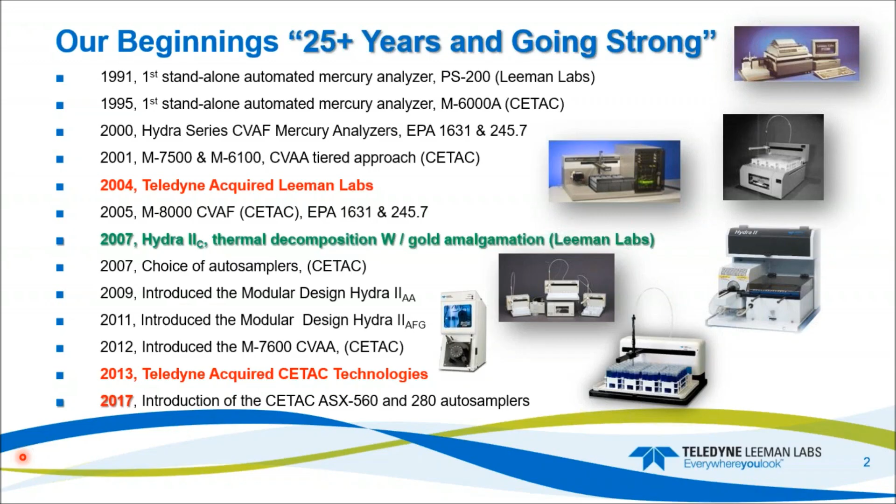Some of the highlights for the Teledyne Leeman Labs mercury analyzers: we have 4 models, the CVAA systems, the Hydra 2AA, the M7600, the M8000, which is atomic fluorescence and atomic fluorescence with gold, and then the Hydra 2C, which is a combustion system. We have a patented gas liquid separator for the QuickTrace systems, which patent expired in 2016. The QuickTrace systems have a 4-channel 12-roller pump.

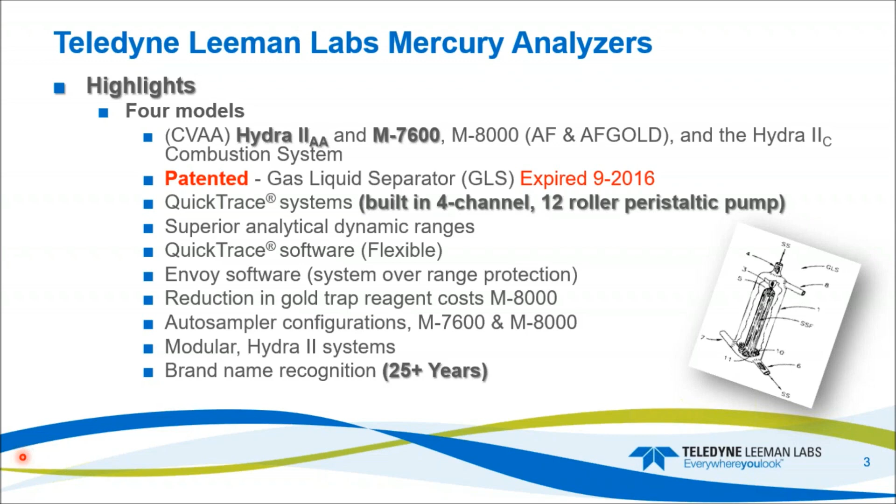All systems have superior dynamic range. The software on the QuickTrace is extremely flexible, and the Envoy and the QuickTrace have overrange protection. We have gold trap reagent cost savings in the M8000, the CVAF system. Auto sampler configurations for the 2 QuickTrace models, and the Hydra products are modular, which is a nice feature, and then 25 plus years of brand recognition.

So the 7600 is our most versatile CVAA system. Detection limits are less than 0.5 nanograms per liter, and that's in the most sensitive mode of operation. With that system, we have the capability of achieving the method detection limits for US EPA 245.7. The method detection limit, as I recall, is 1.8 nanograms per liter.

But I have to warn everybody that we need to run this with caution. With the BrCl, the bromine monochloride, which is the solution for oxidizing the samples, there is a possibility of forming bromoform with certain samples, and that organic compound will absorb at our wavelength of 253.652. But with that said, the system can hit achievable method detection limits and reporting criteria for that method in less than 90 seconds, achieving a less than 1 nanogram per liter MDL with the method.

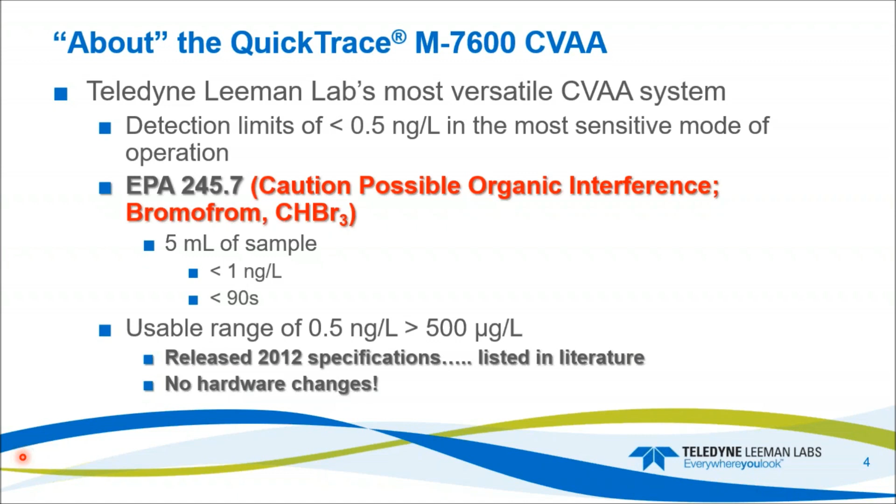Typical range for the system as received is 0.5 nanograms per liter to greater than 500 micrograms per liter. That's our release specification, with no hardware changes. The QuickTrace M7600 is a double beam system, so we have double beam optics and lamp stabilization.

So that is a thermally stabilized lamp compartment, with electrical optical feedback for the lamp control. What this does is, as the lamp ages, it senses the radiation coming off the lamp and bumps the power up, so during the lifetime of the lamp, our IDL or MDL doesn't change. It's a very nice feature, so when the customer is using their M7600 day in and day out, they're going to achieve the same response for the same standard.

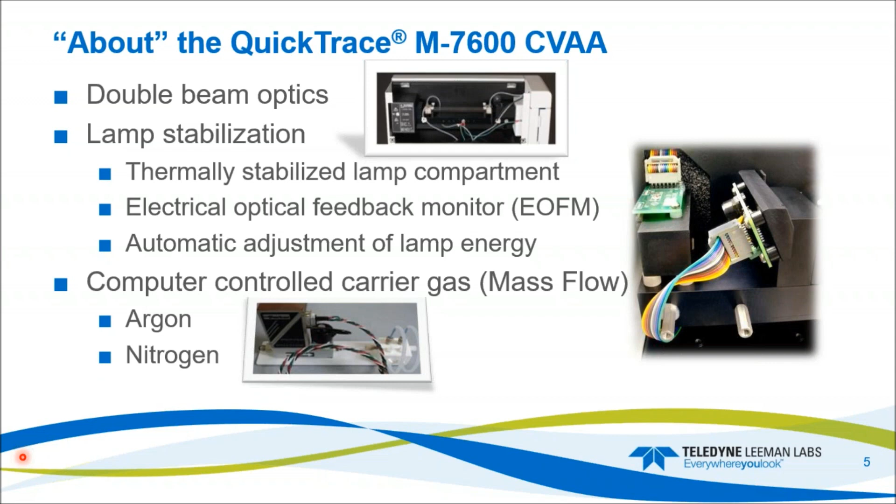Computer-controlled gas flow. It's a mass flow controller. The system is designed and optimized for argon, but it'll also work for nitrogen, greater than a liter per minute argon flow. But since it's optimized for argon, the nitrogen will not quite achieve a liter per minute. It's more in the range of 750 milliliters per minute.

Gas liquid separation. So I mentioned earlier about the patent on the GLS, or the gas liquid separator, which expired in 2016. So this is a center post design, and that's a large reaction surface area to our liquid volume. So when it's running, it looks like it is running basically empty. You're going to see a small amount of liquid at the drain port, and that's about it.

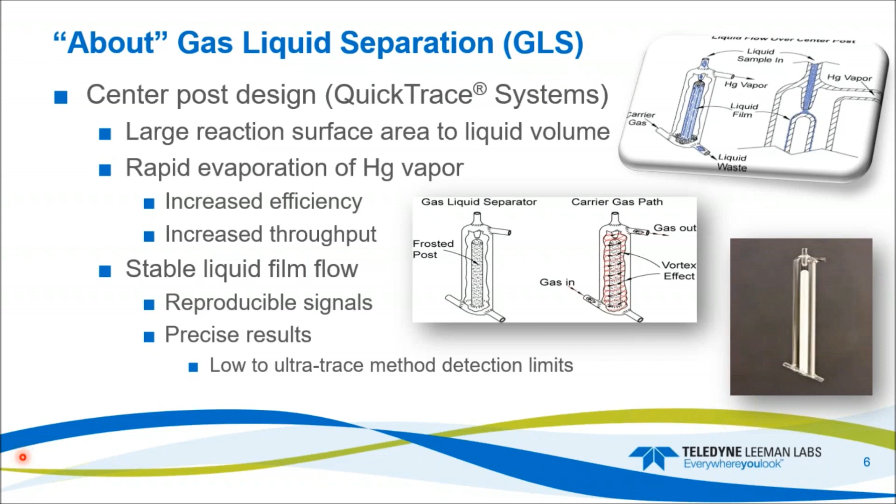So what this system will do for the customer is increased efficiency. That'll increase your throughput. It gives you a stable liquid film, liquid flow, and that in turn is reproducible signals and precise results. So when you take the reproducible signals and precise results, then that affords the customer that ultra-trace method detection limit. So it all starts with the gas liquid separator and our mass flow controller, our double beam optics, and then the 4-channel 12 roller pump.

So the theory of operation. So the samples all have to be acidified. So everything has to be digested. So the mercury's in Hg2+, and then the sample is delivered by the autosampler to the gas liquid separator. So en route to the gas liquid separator, our reducing agent, which is 10% stannous and 7% HCl, already reduces the acidified mercury in the sample to Hg0.

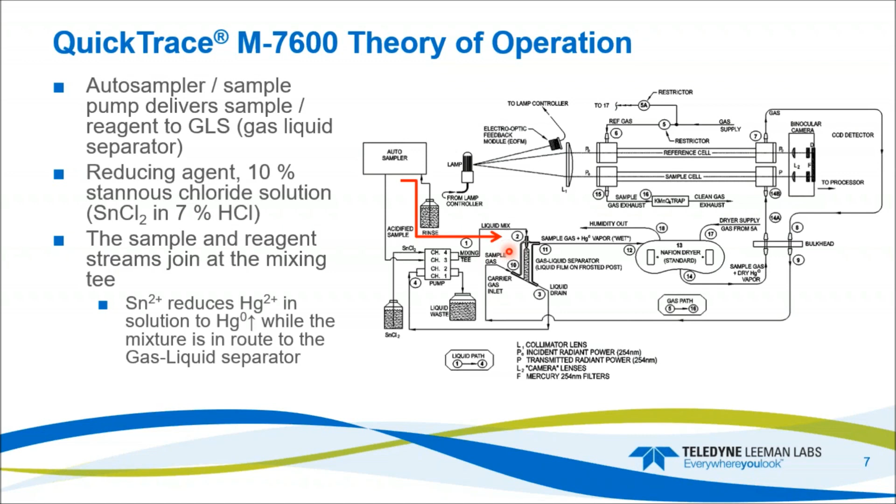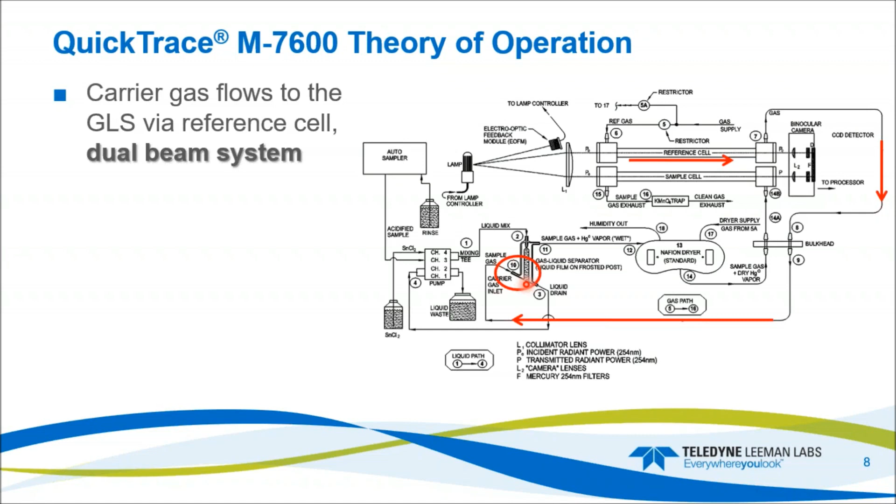From there, we introduce our gas flow. So our gas flow is flowing through the dual beam optics. So it flows from left to right, flows up and around, and then comes in and goes into the bottom of the gas liquid separator. The elemental mercury at this point is already reduced, so it's easily stripped off, and from there it flows into the Nafion dryer, where the water is removed and it's off-gassed into the laboratory.

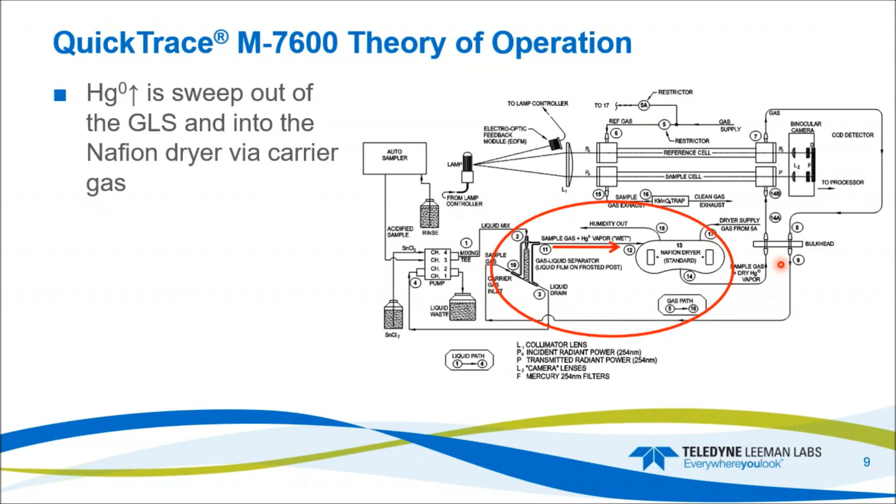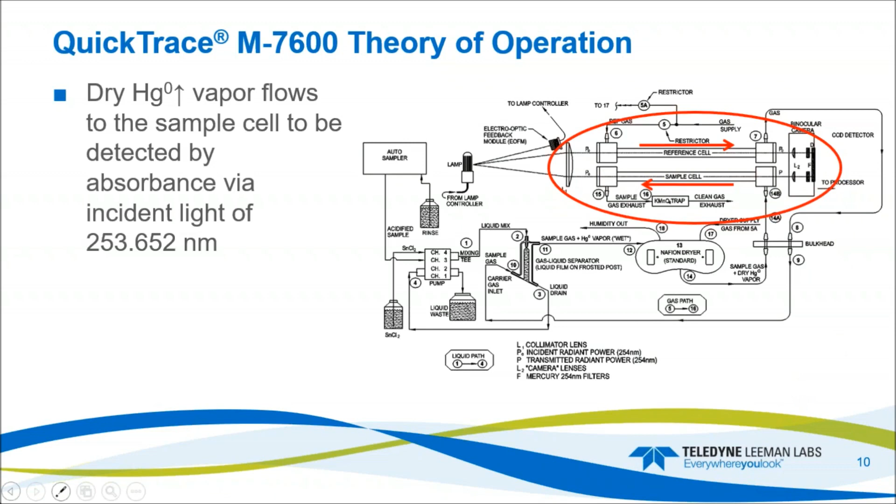It's just water vapor, and the carrier gas, which is argon, and it's laden with mercury, that leaves the dryer, and it goes up into the sample cell. And in the sample cell, the gas flow moves from right to left, so it's counter from the direction of the carrier gas, and this is going to measure the absorbance at 253.652. The detector is a CCD, so we have 2 beams and collimating light through the sapphire windows, and then off to the detector where the light is filtered and the absorption is measured.

The M7600 has very broad linear ranges, greater than 4 orders of magnitude. So our typical dynamic range for the system is 0.5 nanograms per liter to greater than 500 micrograms per liter, or ppb. So here's an example of the orders of magnitude of linearity. So we're achieving 3 9s and an 8 9, and here's the values from this curve.

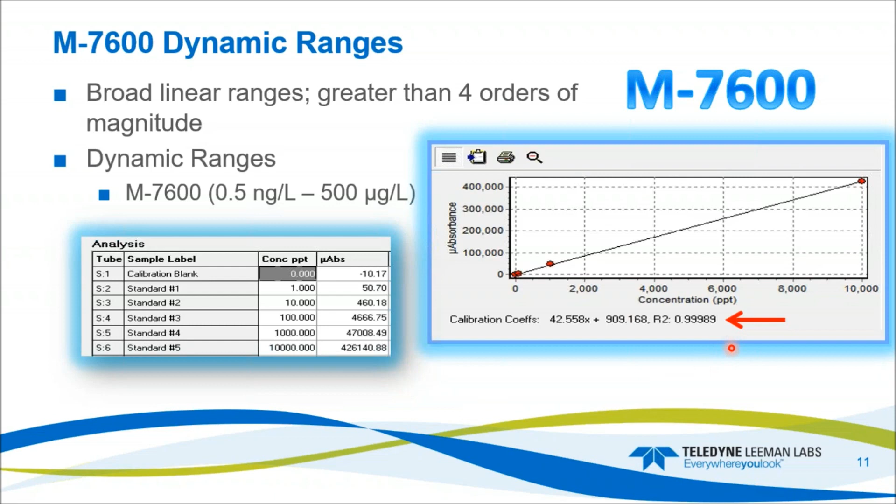So we went from a 1 nanogram per liter, 1 ppt, up to a 10,000. So here's the first order at 10 ppt, 100 ppt, 1,000, and then a 10,000 ppt, or a 10 ppb. And you can see the response. The response is very linear, greater than 3 9s.

So now that the basic theory of the system has been discussed, what affects this dynamic range? How can we get such a broad dynamic range with this system? So it's gas flow, pump rate, and time in sample. So if we adjust the gas flow, high flows will equal a short residence time, and that gives us speedy results, but it decreases sensitivity. So again, decreased sensitivity, we expand that dynamic range.

Low gas flows are long residence times within the optical bench, optical cells, and that will increase the sample times, but it increases the sensitivity. So if it increases the sensitivity, we are decreasing our IDL and our MDL. Pump rate, same thing. It'll increase or decrease time to the GLS, and that changes the mercury load within the system that is taking the Hg0 and sending it off to the optical system for measurement. So that changes our flow.

So gas flow and pump rate, and now time in sample is the third leg of the stool. So time in sample to adjust a steady state for a flat signal on the plateau for peak height. We can also use peak area. So if you want to just measure everything under the curve, your peak signal will be similar to a liquid chromatography peak, and it will be everything under the curve. You can go really, really fast. We can typically run samples less than 60 seconds and more in the range of about 50 to 45 seconds.

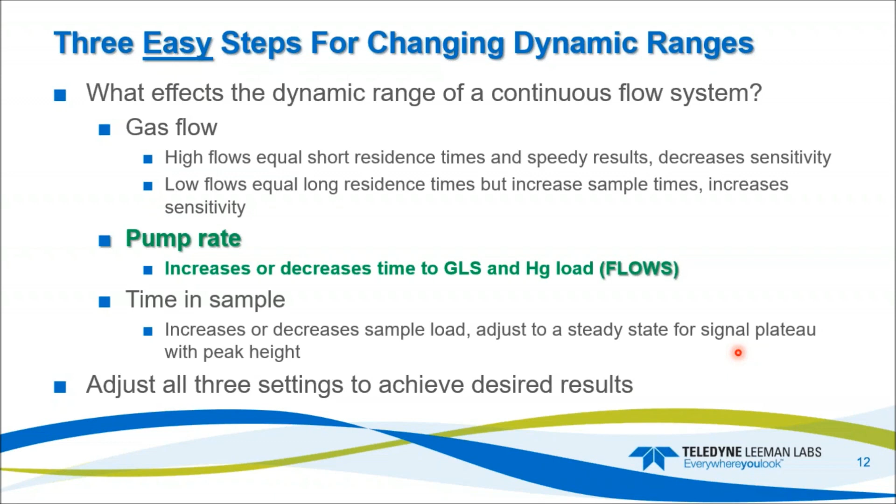So you adjust all three of these settings to achieve your desired result. So again, 3 steps: change the gas flow, change the pump rate, and change the time in sample. So what are the advantages of this 12 roller 4-channel pump?

So the original tubing harness gives you UltraTrace method detection limits. The sample's not consumed, so you can go back and check out the responses from samples that may be in question, so you can allow repeats and validation checks. You can also dial in the flows for high concentration or UltraTrace analysis.

It gives us wide dynamic ranges, and the liquid uptake is from greater than 1 milliliter at 5-second sample to a max rate of 15 milliliters per minute, and that's at 60 seconds of uptake time. So if you haven't guessed already, the max rate at 100 RPMs is 15 mils per minute with the current pump tubing that we're using.

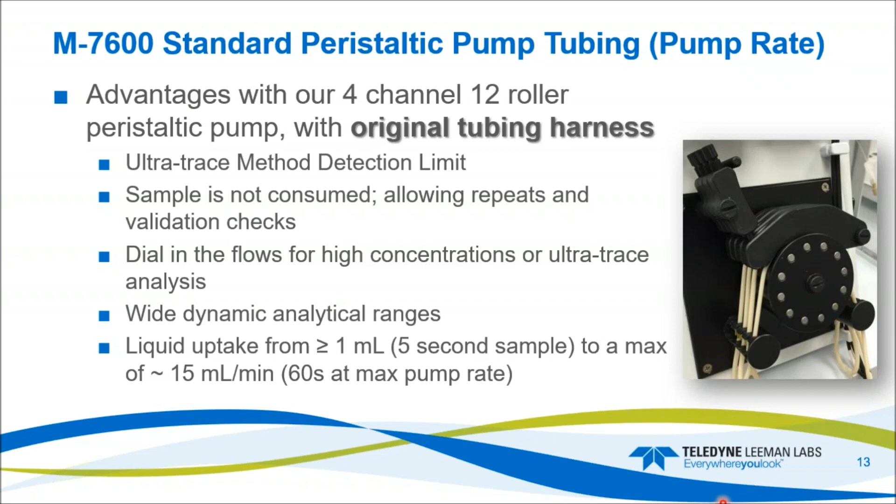So the original pump tubing, parallel channels are for the drain. So channel 1 and 2 are using yellow. The ID is 1.42 millimeters, and the part number is SP5705A. For channel 3, which is this one right here, that's still yellow, same ID at 1.42, so same part number. And channel 4, which is black, that's our reducing pump tubing, and that is 0.76 millimeter for the ID, and the part number is SP5705B.

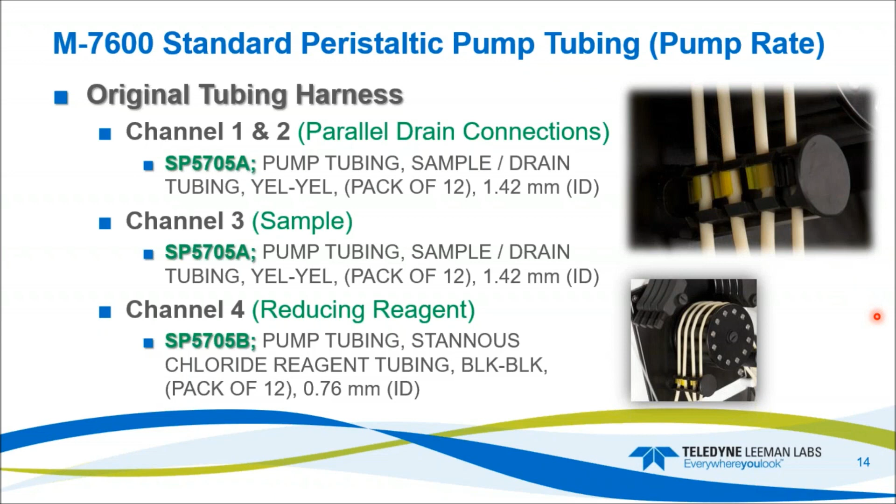So why do we have 4 channels and 3 are the same? So we're pulling sample in and then pulling reagent in, and we want to ensure that that GLS runs empty. So we exceed the input of the volume with the output going to the drain. So we make sure that the system is empty at all times.

So the alternate pump tubing, this is now where we get into the green chemistry. The introduction alluded to green analytical. So the advantages now are still, we have UltraTrace detection limit. Still the sample's not consumed, and you can do the validation and checks of existing samples already previously ran. You can dial in your flow concentrations for UltraTrace analysis.

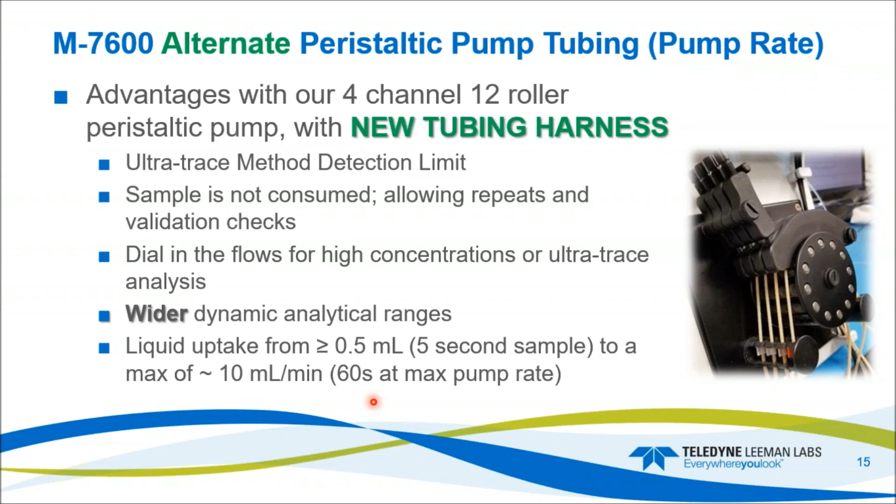That's still in play, but we have a wider dynamic range, and that's simply because we're using less sample. Less sample is part of the 3-legged stool. We're going to be changing the process slightly, and we're going to increase the concentration by reducing the sensitivity of the system. Liquid uptake is 0.5 milliliters, and 5 seconds is our minimum, and now our max flow rate is approximately 10 mils per minute, 60 seconds at 100% pump rate.

The alternate tubing harness, channel 1 and 2, the part number is 15-4308-102, and our ID of that sample tubing and waste tubing is 1.02 millimeter. Channel 4, which is the reducing, is part number 15-4309-102, and the ID is 0.51 millimeter.

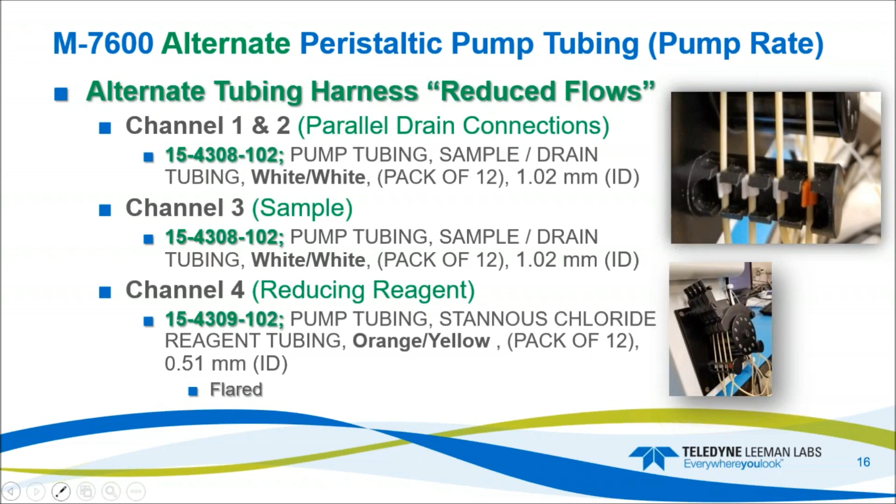This is an extremely small ID tubing, so in order to have it compatible with some of the fittings and barb fittings that we use on the system, we had to have it flared. So this tubing is a small ID, but it's flared, so it holds its flare and it allows the customer to attach it to the tees and capillaries and so forth.

So the alternate pump tubing at 100% rate, as I mentioned earlier, we're now at 10 milliliters per minute. That is 67% of the flow from the standard tubing. So 33% savings right off the bat. The reagent went from 5.7 milliliters down to 2.7. So that is 47% of the standard tubing. So it's a 53% savings on flows.

So our combined flows with the new tubing harness is 40% on combined flows for waste. So that's including the stannous chloride and the sample. So the waste generated is approximately 40% less. At 100% pump rate, that gives us a reduction in stannous chloride because we're 53% less, about 47% of the standard flow for the reducing agent. That's 180 milliliters per hour.

So if we look up some of the standard pricing for stannous chloride dihydrate, a 500-gram bottle could be anywhere from $400 to $600 per bottle MSRP without your discount. So let's just assume $500 a bottle, so 10% stannous in a liter of solution during an 8-hour day. That's going to save us $150 US because we're actually saving 1.4 liters.

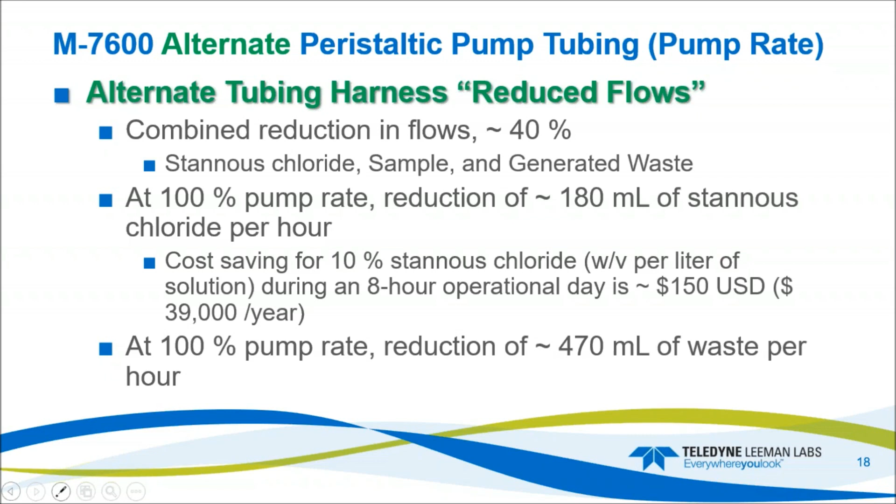And if we multiply per day by 5 days a week, 52 weeks in a year, that's going to give us an overall savings of $39,000 US in stannous chloride alone by going to this green chemistry with the alternate tubing. So at 100% pump rate, that also gives us 470 milliliters of waste reduction per hour, which is also costly

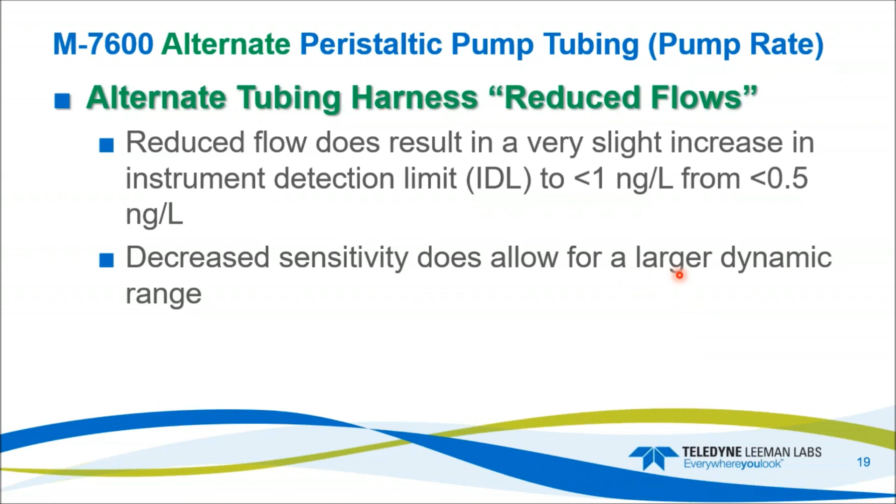to dispose of. Reduced flows do result in a very slight increase in instrument detection limit. We are now at less than 1 nanogram per liter, so that's up from 0.5 nanogram per liter, so not a lot, but slight, due to the decrease in sensitivity. But that decrease in sensitivity does allow for a larger dynamic range of the system.

So the flows are very linear. With the new tubing harness, we tried all different pump rates and different scenarios, and we tested the system for many months, and they pretty much average out to the same. So the reduction in sample uptake is about 33%, and the reduction in reagent is about 53%.

So here's at 80% pump rate, and sample is 12 down to 8, and the reagent is about 4.5 milliliters per minute down to 2.2 milliliters per minute. So again, 53% reduction. That's where the big savings is going to be, in the stannous chloride of this system.

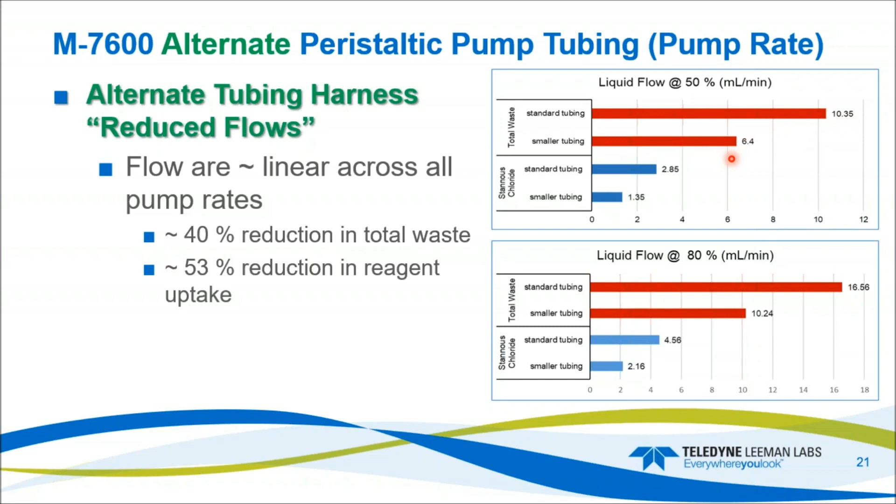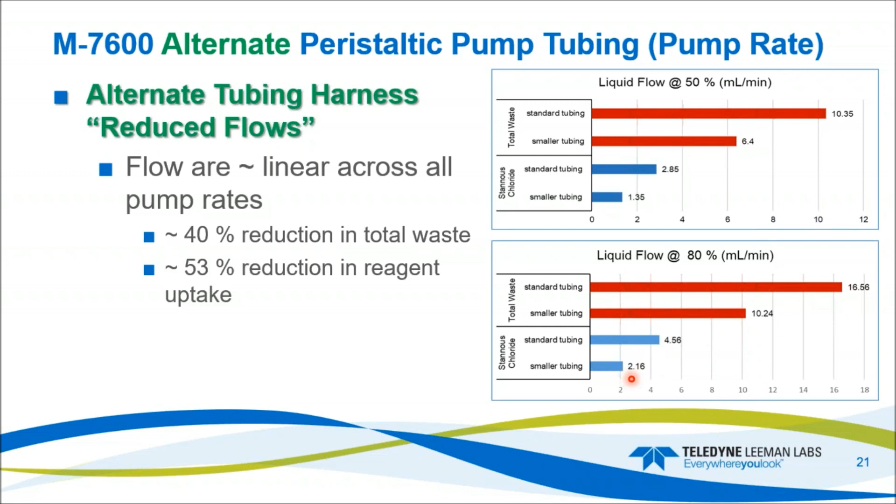So here's an example of liquid flows for waste at 50% and 80%. So 40% reduction. So we're at 10 mils per minute liquid flow waste, down to 6.4, so approximately 40% reduction. And here is 50% for the stannous at 2.85 and 1.35. So again, about 53% reduction in stannous chloride flow, or 47% of the original flow. Same thing at 80%, we're 16.5 down to 10, and then 4.6 down to 2.2 for the reagent flow.

Method development. So you're going to obviously have to do some method development with the new tubing, but method development is relatively easy. We have our method editor on the favorites bar. In there we have file, tools, conditions. Conditions is where you're going to spend most of your time. This is controls for the autosampler and the analyzer, method timings and settings, so uptake, baseline corrections, peak reads, and so forth. We also have our standards and our QC tests all lumped into the method editor.

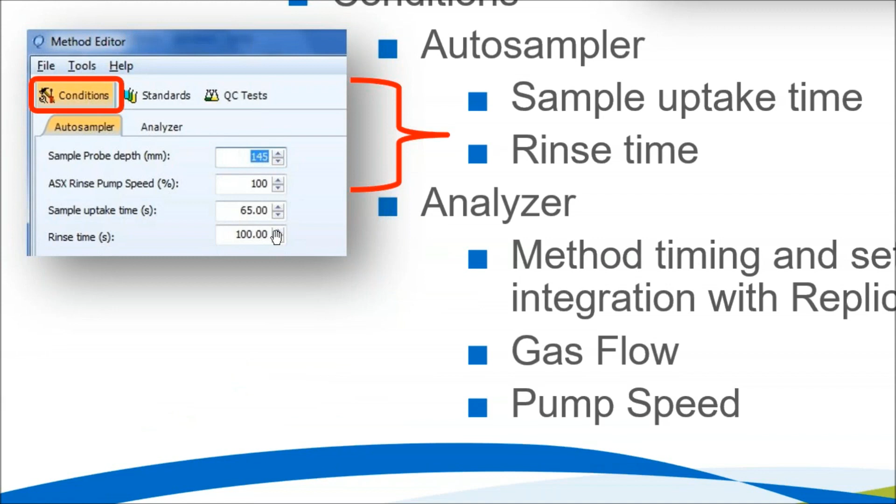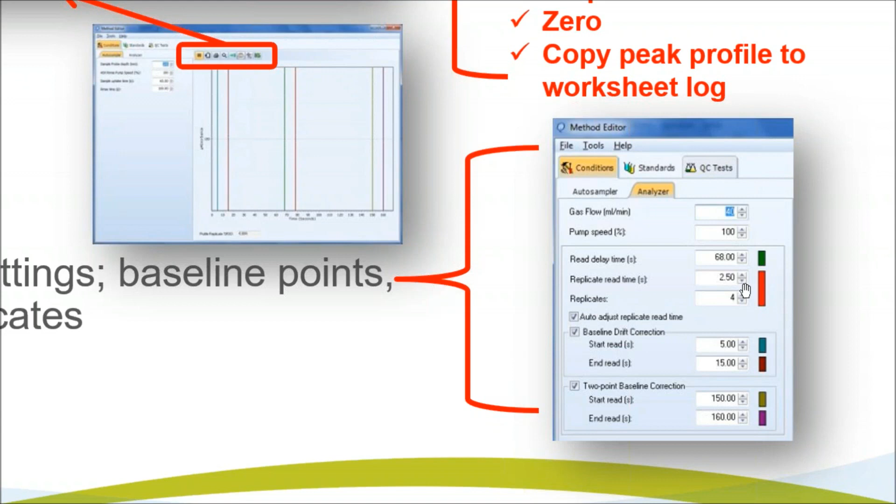In method editor, we also have under conditions, this is where you're going to enter in your timing for the system. In your timing for the system, you have autosampler, so it's time in sample and rinse time. And then under analyzer, you're going to have your timing for that system as well, which is your pump speed, your gas flow, read delays, time in sample, replicates, and your baseline correction points. So this is all done in real time.

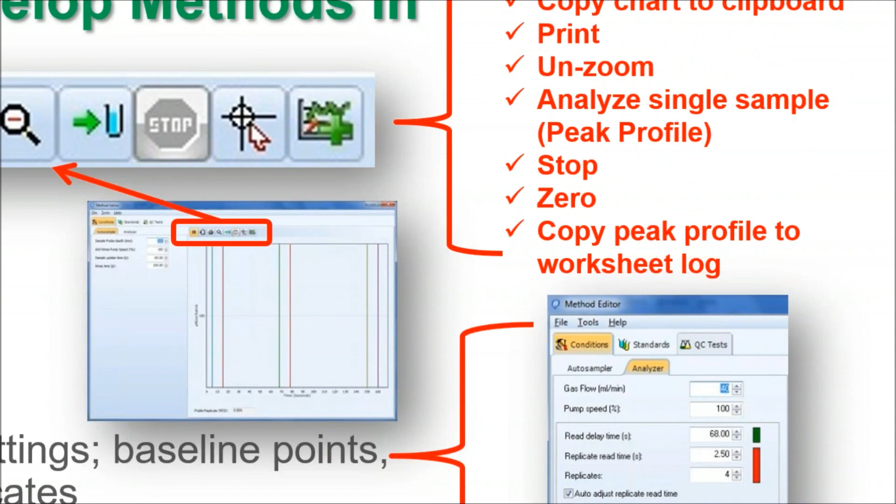When you're doing your method development, above the graph, we have the favorites bar for this, and this is toggle your grid lines, copy chart to clipboard, print, un-zoom, peak profile, so that's a single sample read, stop, zero, and copy your profile to the worksheet log. So basically you load your sample up, you go to a single sample, and it reads it, and this is in real time.

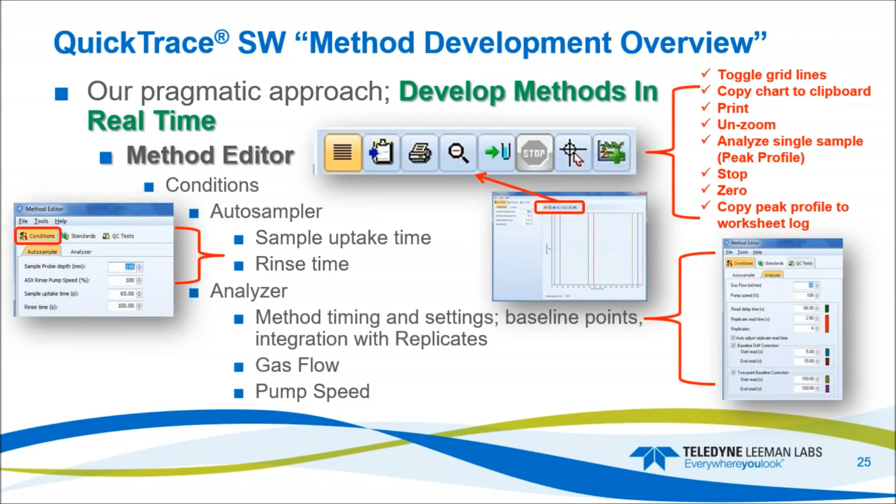So in real time we can adjust the integration points and the baseline points to make changes for the method development, and you can add them in here under method editor, under analyzer. So you can grab the read delays with your mouse and move them from left to right, or you can simply bring them over here and type them in, or you can toggle them up and down. So when that happens, you can see how the method is working for you based on your relative standard deviation for the peak height of that sample.

So once it's all done, here's how it works. You have pump speed, gas flow, sample uptake, rinse time, integration time, baseline correction points. So you peak profile. You want to use your highest concentrated standard to do the peak profile, because everything will fall in line underneath that. And then you adjust all your timings for that stable signal on your peak height.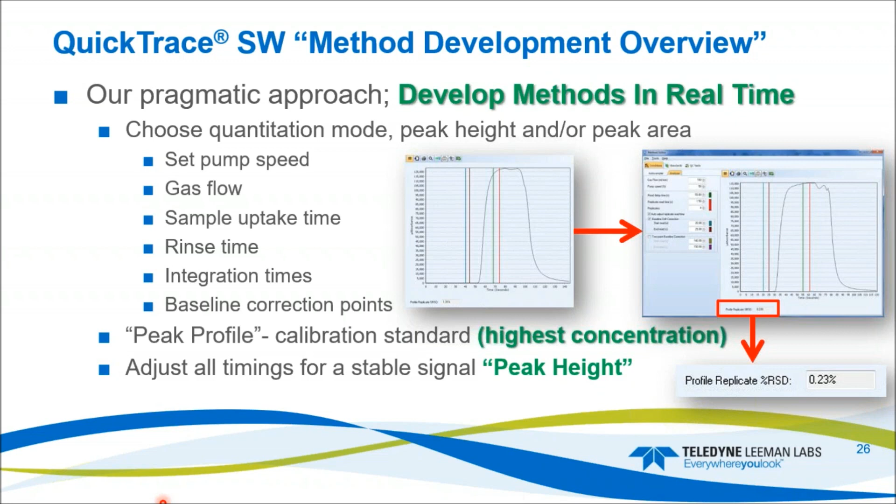So you very simply run it, look at your graph, and then adjust your baseline correction points and your peak integration for your lowest percent RSD of that peak height. And this is all done real time. It takes maybe a minute to 2 minutes to develop that profile, and then you're ready to go with your calibration.

So for the reduced ID pump tubing, we've set up a couple of basic methods to start. This one is 0 to 100 nanograms per liter, and the range is less than 5 nanograms per liter up to about 100. Gas flow is 40, pump rate is 100%. Our sample flow is about 10 mils per minute, and our rinse for our autosampler is variable up to 100%. So we need to have a positive rinse flow. If you have positive rinse flow, you're flushing the system better, you're not pulling air into the system, and you're going to get more stable results.

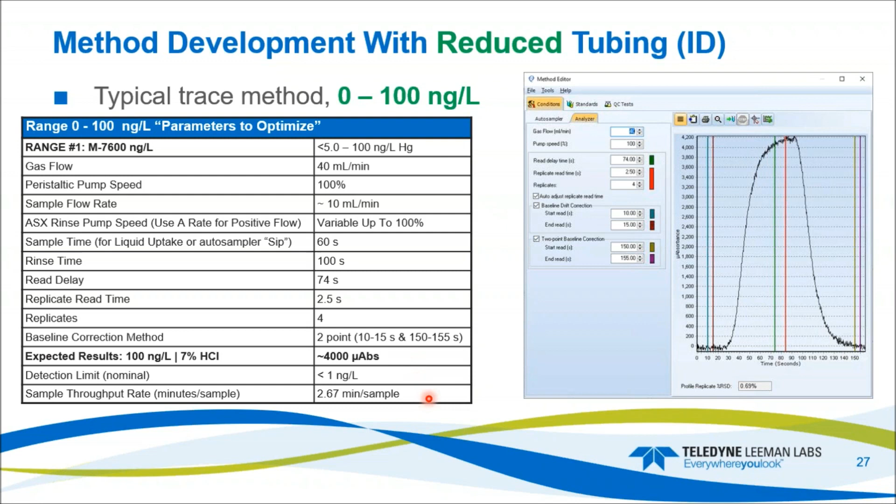Sample uptake for this was 60 seconds, and our rinse time was 100 seconds. So our total analysis time is approximately 160 seconds. Our read delay was at 74 seconds. So the read delay is right here. This is where it's going to take the information for the peak height. We're doing 4 replicates, 2 baseline correction points for this. And our response is about 4,000 microabsorbance units for 100 ppt. So that gives us a slope of 40 microabsorbance units for each ppt. Total analysis time was about 2.67 minutes.

Here is 0 to 20 ppb, microgram per liter. This is a typical range where most laboratories will be operating. Most of the methodologies that environmental labs will be running are in the ppb range, maybe 0 to 5, 0 to 10, or even 0 to 20 microgram per liter. So this one is set up for 0.1 to 20. Gas flow is 100 mils per minute now instead of 40. Pump rate went to 50% instead of 100. As I mentioned earlier, it's very linear with these flows with the new tubing.

So now we're at about 5 mils per minute sample uptake. Rinse up to about 60% variable. That's going to give you your positive rinse, so you're not pulling solution out of the rinse station faster than it's supplying. Sample uptake time is 55 seconds and rinse is 110 seconds. Obviously, we have higher concentration, so we want to make sure it's rinsed out to baseline. Read delay 77 seconds. Replicate time is 2 seconds.

Our response is 135,000 units for 10 ppb, so that gives us a slope of about 13,500. And with that, our nominal detection limit of this method is going to be less than 0.01 microgram per liter, or less than 10 ppt. Sample time is about 275 seconds.

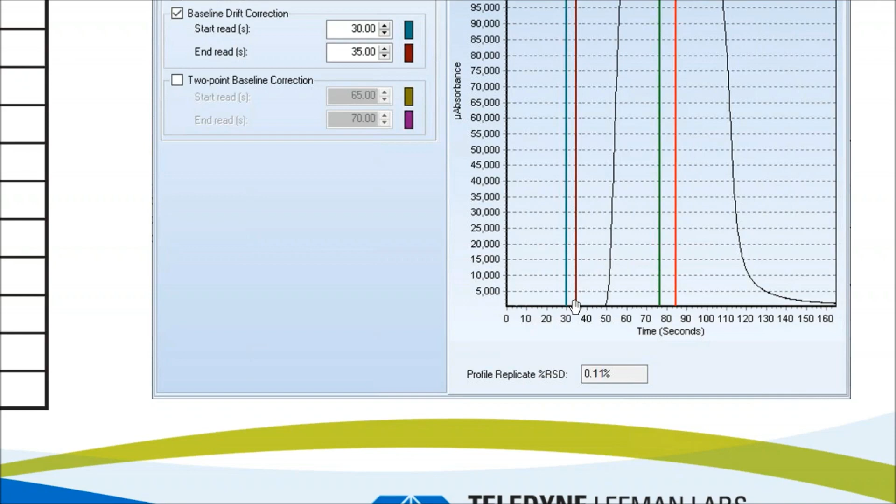So we could take that out of the rinse and have it coming down to baseline here, as long as it's at baseline before the integration point. So instead of having a rinse time of 110 seconds, that rinse time could be 80. So we could take 30 seconds of analysis time just by utilizing the front end coming down to baseline before that baseline correction point. So there's lots of ways to increase the efficiency of the system.

So typical performance with the new tubing is 0 to 100. The trace range, gas flow is 40 mils per minute. Our IDL is less than 0.8 nanograms per liter. They were coming in around 0.6 to 0.7. So it's definitely less than 1 nanogram per liter. Short-term precision at n equals 5 at 5 ppt is less than 3%. 20 ppt at n equals 5 is less than 2%.

The response is 40 microabsorbance units per nanograms per liter. In the ppb range, our IDL is less than 10 ppt, 0.01 ppb, gas flow is 100, and the precision at n equals 40 is less than 2.5% at 200 ppt or 0.2 ppb. And again, the response, our slope is about 13,500 units per ppb.

So to validate the tubing, we used two different methods. One was US EPA 7471, which is from your solid waste manual 846. It is for soil, sediments, bottom deposits, and sludge type materials. Our calibration was 0.2, 1, 2, 5, and 10 ppb. The samples were approximately 2 grams in 50 milliliters, and this is done by block digestion.

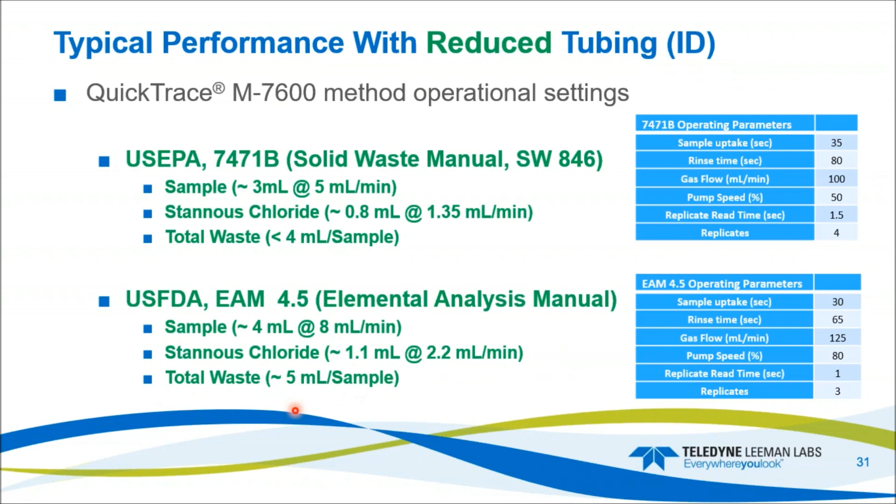For the FDA method, we are at 30 seconds of uptake, but 80% pump speed. So that gives us approximately 4 mils and 1.1 of the stannous, so less than 5 mils per sample, total sample load of waste.

The samples that we used for validation: laboratory control sample, a laboratory control duplicate. We analyzed some over-the-counter salmon, duped it, and also over-the-counter crab. And for tuna, oyster, and mussel, we had CRM, SRM type material. For the EPA method, for the sediments and solid waste, we had fly ash, Tennessee River sediment, industrial sludge, and coal. The Tennessee River sediment was relatively high at 50 ppm, so we diluted that by 50 prior to analysis on the system.

CRM recoveries were very, very nice across the board. Two different methods, two different digestion techniques. The lowest percent recovery was 92.6. So here's the concentrations, just for reference, of those samples. So both the US FDA and the US EPA methods performed very nicely as expected with the new tubing.

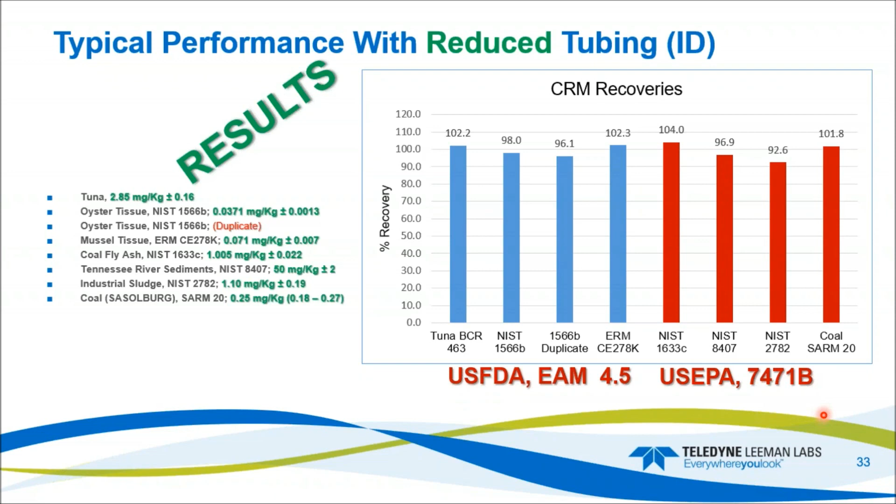And one of the reasons for this is we did not change the ratios of sample to reagent usage. The ratios are almost identical, so that didn't change the kinetics of the pump rates and the gas, the reduction by the stannous of the mercury from Hg2+ to Hg0 within the gas liquid separator.

Spike recoveries for the food samples were really, really nice. So the salmon and the FDA, lowest one was 86.4. So the salmon, the raw, was a result of 0.0113 ppm, milligrams per kilogram. If we assume 100% conversion to methyl mercury, that is 0.0121 milligrams per kilogram methyl mercury. For the crab, that came out to 0.0084 milligrams per kilogram methyl mercury.

So based on the World Health Organization, they say 1.6 micrograms per kilogram of body weight is what they allow per week consumption of methyl mercury. So this turns out to be 0.0016 milligrams per kilogram, ppm.

So that would mean that an average male in the world is 80.7 kilograms. They can consume less than 0.129 milligram per kilogram of methyl mercury tainted food and still be relatively okay based on the World Health Organization. Average female is 76.4 kilograms, so they can consume 0.1222 milligram per kilogram. So if you look up here, you could eat the whole entire kilogram of salmon and/or crab and still be okay. It's a lot of food, but based on that organization, you would be fine.

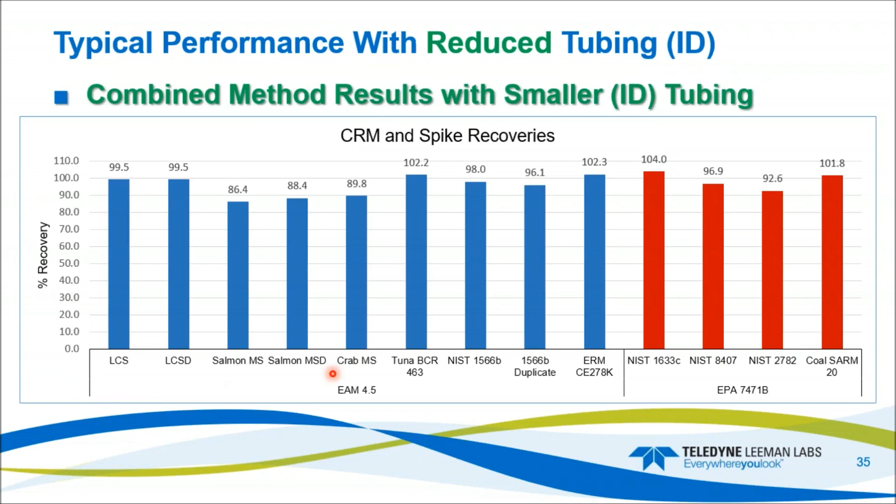Combined results. So the CRM and SRM spike recoveries were very nice. This is an aggregate, just a top level view left to right of all the performance of the system, percent recoveries. So everything is above the 80%. Lowest spike recovery was 86.4, but then all of the recoveries for the SRMs were well within the range. We like to see the up and down below 100%, which tells us that the system is performing as expected. So if you have everything above the nominal range of 100% or everything below the range of 100%, I would tend to look for some type of analytical problem or a determinate error within the system.

Summary of the pump tubing. So the flows for the standard ID, 15 mils per minute. So we went from 15 milliliters per minute down to 10. Stannous chloride went from 5.7 down to 2.7. Total waste at 100% rate went from almost 21 milliliters per minute down to 14 milliliters per minute. And the variable rate for the uptake, the lowest we picked up before at 5 seconds is 1.25 milliliters. Now we're down at 0.8.

Detection limit did change slightly, again from less than 0.5 to less than 1. And typically with the standard tubing, instrument detection limit on the system is around 0.2 to 0.3 nanograms per liter. I say less than 1 here, but we were like 0.6 to 0.7. So it is basically double of what the other one was, but we're changing the rate, but we're still less than 1 nanogram per liter, which is much better than a lot of the other systems on the market. Usable range, we did increase slightly up to 700 ppb, up from 500, so an increase of approximately 200 ppb.